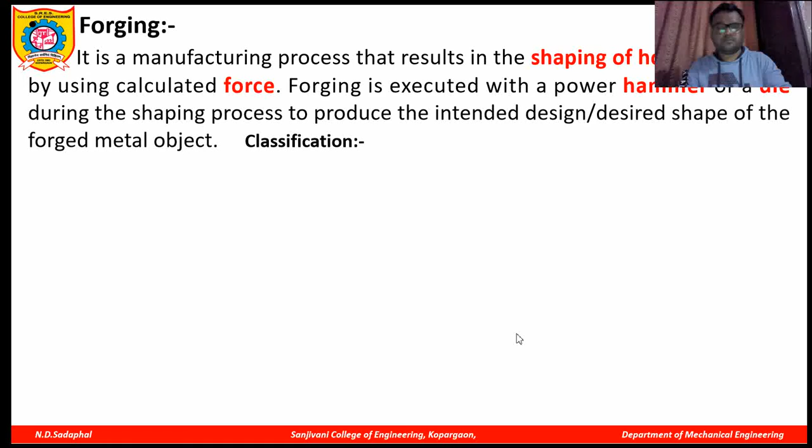Hello all. In this video we are going to learn about the next manufacturing process, that is forging.

So what is forging? It is a process of shaping a hot metal workpiece by using a calculated force. So how it is done? Before the forging process, a workpiece is heated in the furnace till its plastic form, and then it is placed on the dies, lower die and upper die. Workpiece is placed on the lower die and a force is applied by a hammer, or it is also called a die, and the workpiece is deformed into a desired or design shape. So this process is called forging.

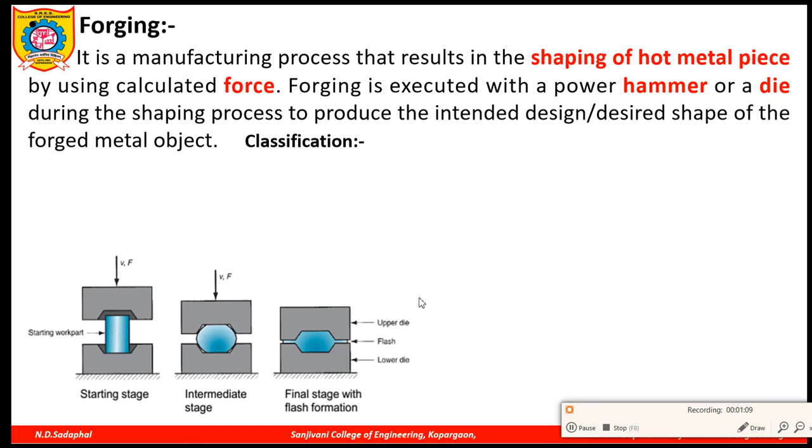So if you see these two figures, this figure and this figure, what actually is the difference between them? In the first figure, this is the lower die, this is the upper die. Here too this is lower die, upper die. If you see the shape or structure of the dies, in the first case the die's cross section is flat. Both upper die and lower die are flat. Workpiece is placed on the lower die, force is applied by the upper die, and it is deformed into the required shape. In the second figure, you can see both dies having some cavity shape, which is the required or desired one. So workpiece is placed on the lower die, force is applied by the upper die, and the workpiece is deformed in that particular cavity or shape, so you get the desired required shape. So what is the difference between these two figures?

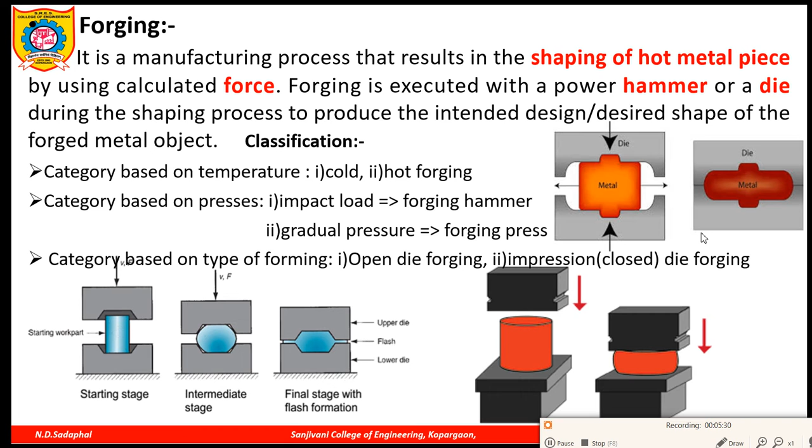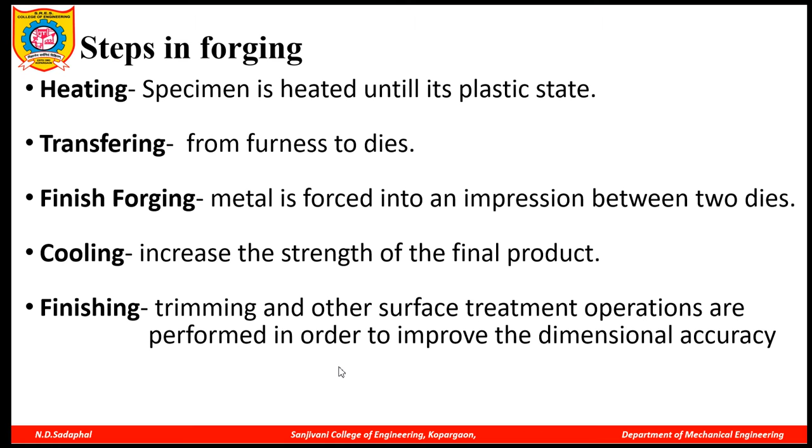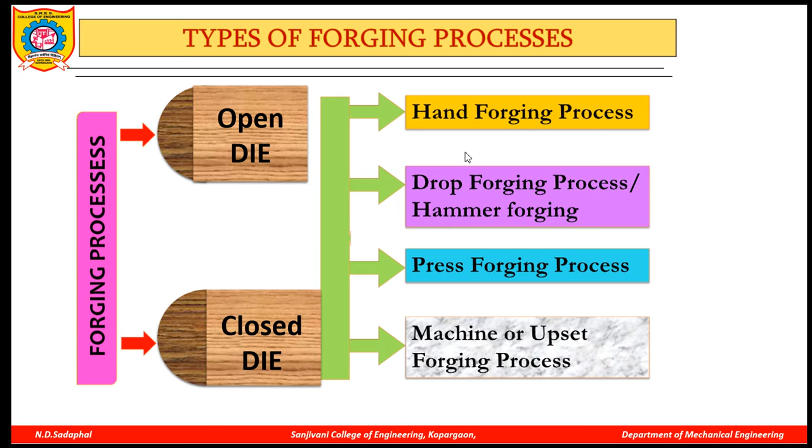Now in open die and closed die forging, there are basically four types. First is hand forging. Next is drop forging, also called hammer forging, press forging, and machine forging, or also called upset forging. So one by one we'll see.

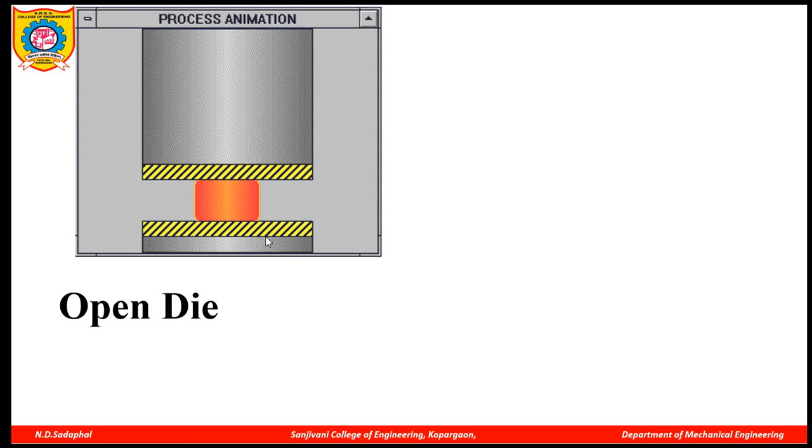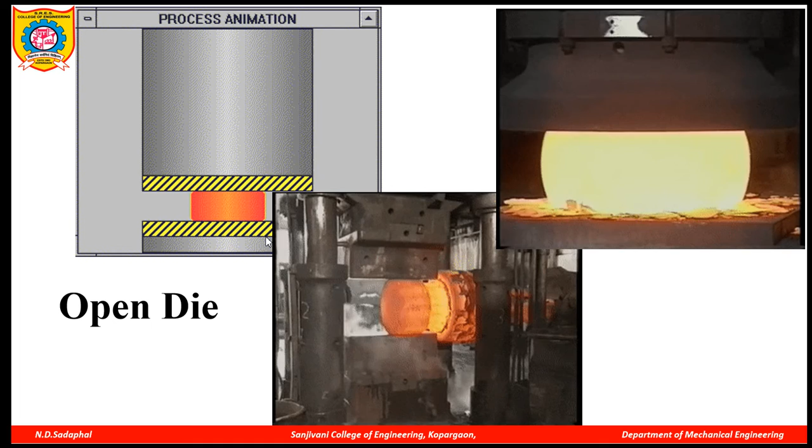So what is open die? Already we have seen when two dies, upper die and lower die, have a flat cross section. The workpiece is placed on the lower die, force is applied by the upper die, and the workpiece gets deformed. This animation you can observe. So it is called open die forging. Both dies have a flat cross section.

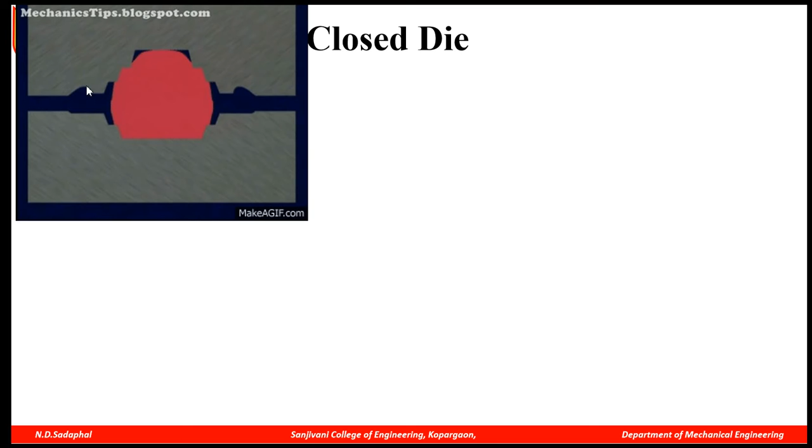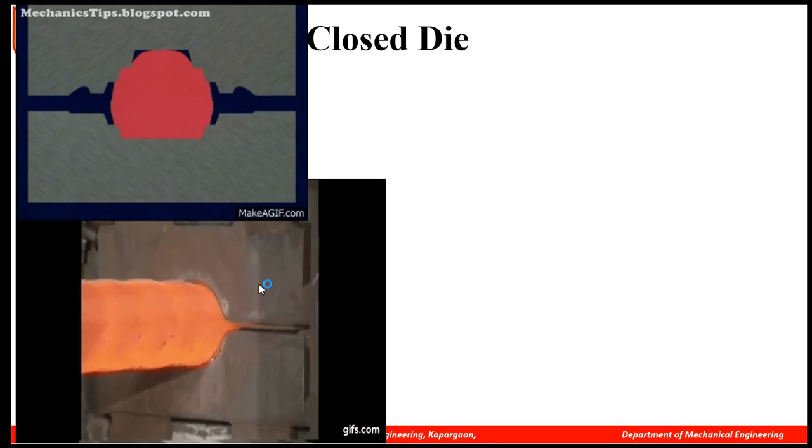What is closed die? The lower die and upper die have a certain cavity of the desired shape. In both cases, force is applied by the upper die. The lower die is stationary. So it is called closed die forging.

There are four types of closed die and open die forging. What is hand forging?

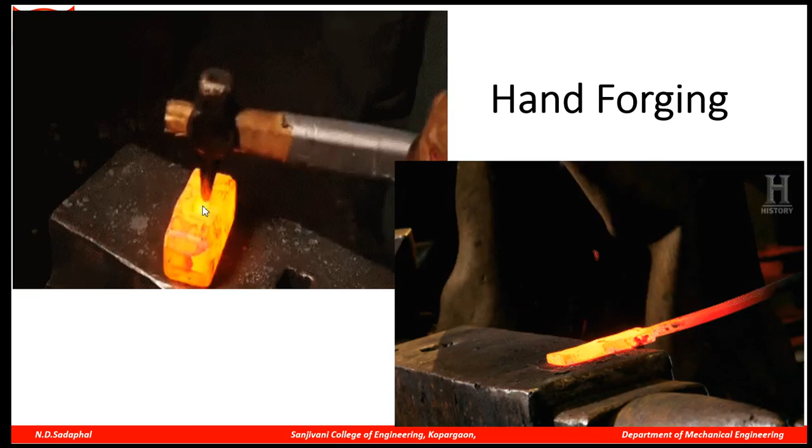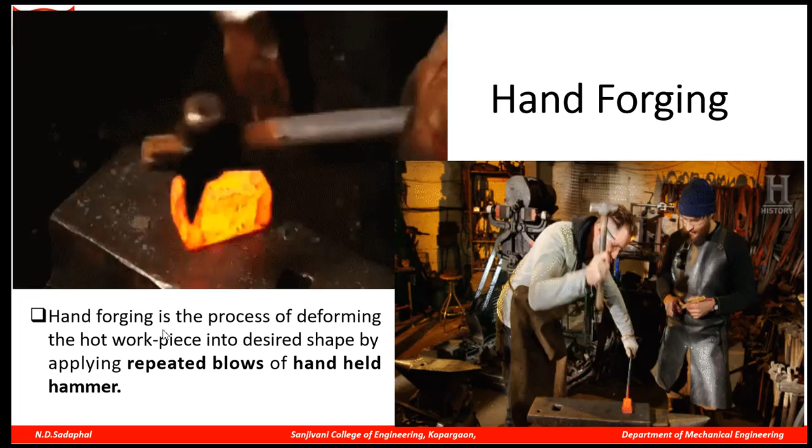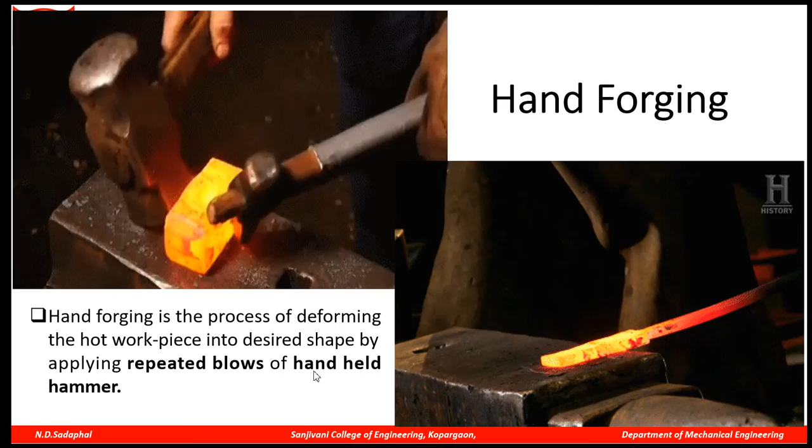Now you can see hand forging. A hot workpiece, heated in the furnace, receives sudden blows with the help of a handheld hammer. Manually a force is applied with the help of the hammer. So hand forging is a process of deforming the hot workpiece into the desired shape by applying repeated blows, given manually with a handheld hammer. So it is called hand forging. There is no use of machine here.

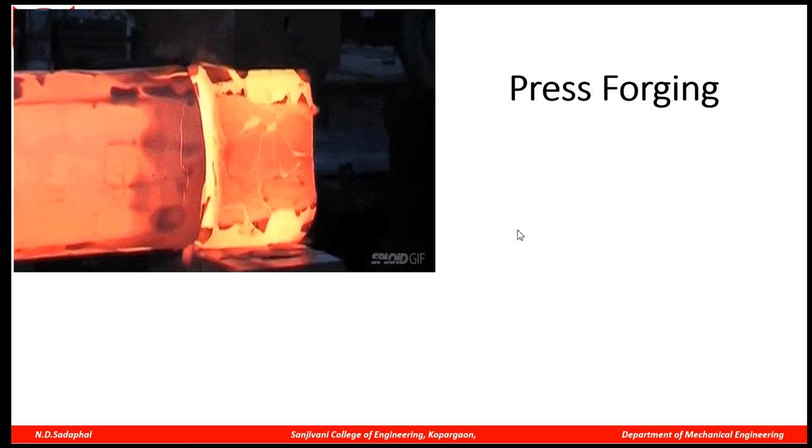Next, press forging. Both videos or animations show press forging. The workpiece is placed on the lower die. The hot metal workpiece is placed on the lower die, and pressure is applied by the upper die. Now see the motion of the upper die here, it is moving very slowly. So press forging is a process of shaping a hot metal workpiece by slow and squeezing action of the upper die.

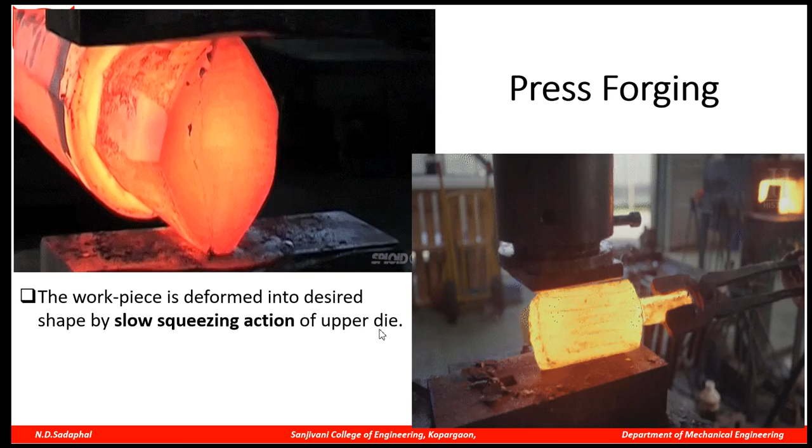Now how do you provide a slow and squeezing action of the upper die? With the help of hydraulic fluid pressure. So here the upper die is compressing the workpiece, and this compressive force is applied by the upper die with the help of hydraulic fluid pressure. You can move the upper die very slowly by increasing and decreasing the hydraulic fluid pressure. So it is called press forging, the upper die is pressing the workpiece.

Next is drop forging. So what is drop forging? Now it is opposite to press forging. In press forging, the upper die moves very slowly. In drop forging, sudden blows are given with the help of the upper die. How is the motion of the upper die managed? With the help of compressed air. The workpiece is deformed into the required shape by raising the upper die and allowing it to fall on the workpiece, so that a sudden impact or sudden blow is given on the workpiece. This movement of the upper die happens due to compressed air, which is used to give motion to the upper die. So it is called drop forging, a sudden drop of the upper die.

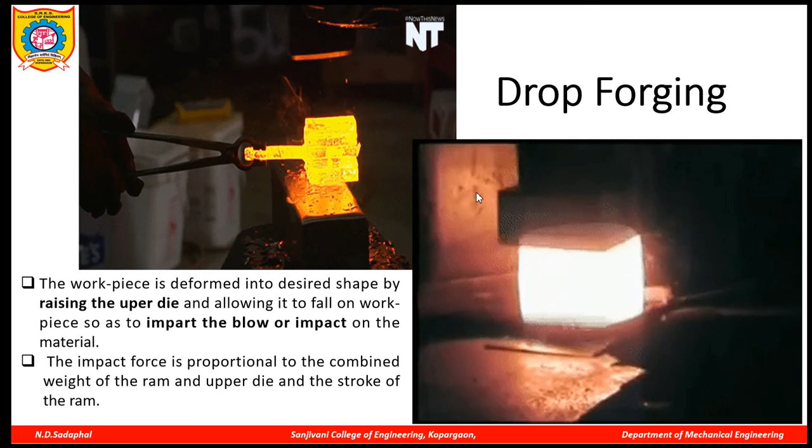Next is upset forging or machine forging. Now this is upset forging or machine forging. If you compare this upset or machine forging with hammer forging, press forging and drop forging, in all these last three cases, the motion of the upper die is in the vertical direction. In press forging also, the upper die moves in the vertical direction. In hand forging also, the hammer moves in the vertical direction.

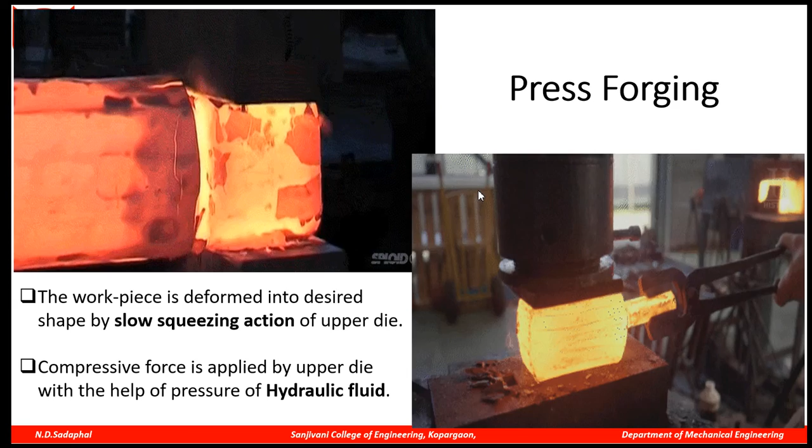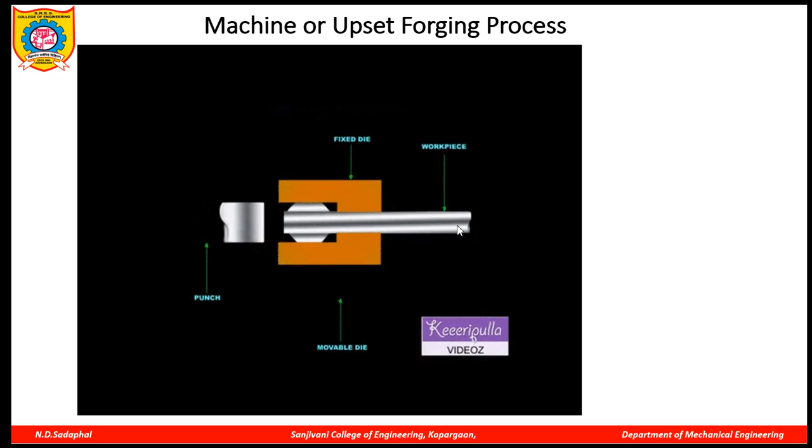Now you can see here, the upper head diameter is more, and the lower portion diameter is less, it is like a bolt portion. So in this way we have covered all the types of the forging process. Next part we'll see in the next video.